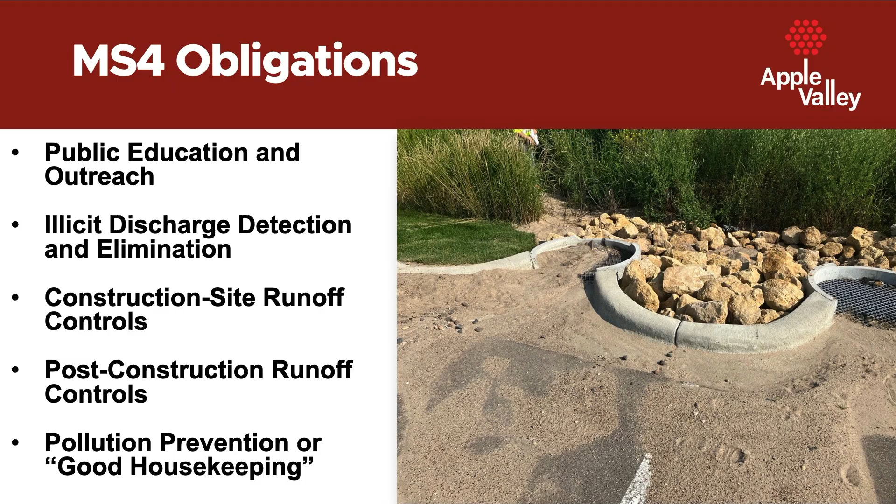So this MS4 obligation, the things that we need to cover: we have to do public education and outreach. We need to discuss illicit discharge detection and elimination, talk about construction site runoff controls, so how you're managing soil on your construction site during construction, talk about post-construction runoff controls, so that's something like installing stormwater ponds after development occurs, and then probably the biggest piece that we have to deal with is pollution prevention or good housekeeping.

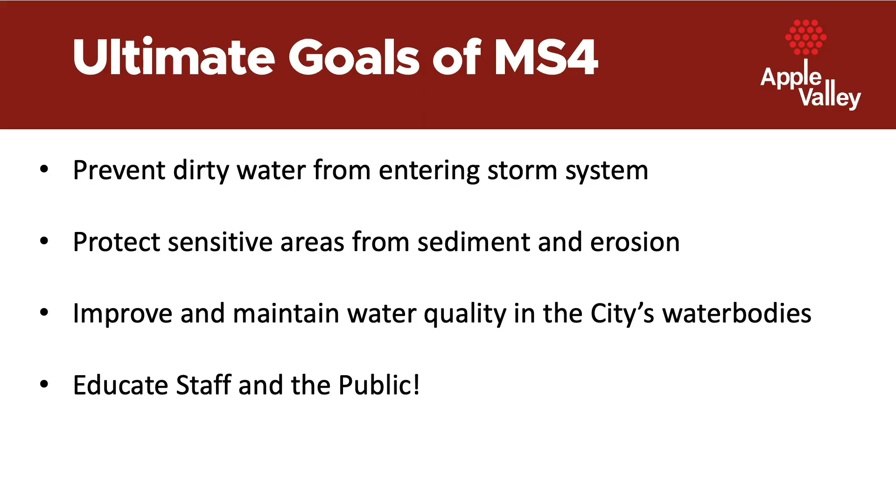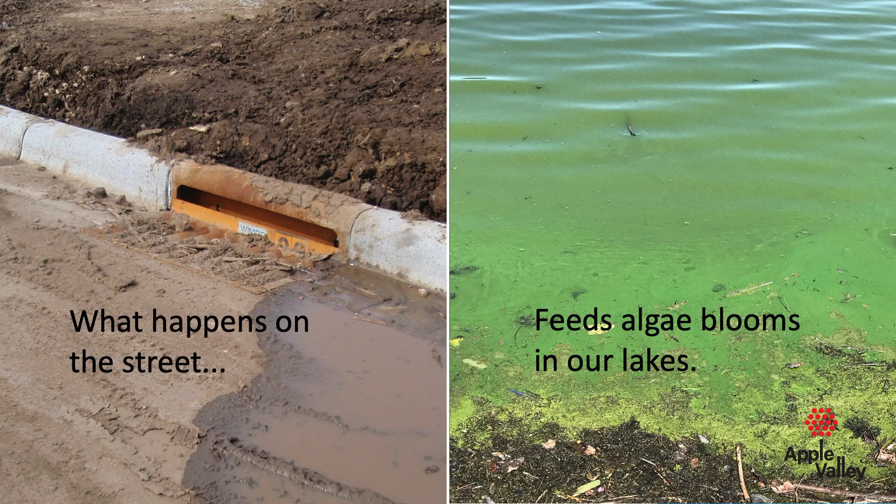If I had to sum up the ultimate goals of the MS4: one, prevent dirty water from entering the storm system; two, protect our sensitive areas from sediment and erosion; to both improve and maintain the water quality in our city water bodies; and then of course to educate the staff and the public. But really to sum it all up: only rain down the drain. Because ultimately, what happens on our streets can feed algae blooms in our lakes.

Just want to cover a little bit of the public education and outreach that we do. We do offer homeowner grant programs and workshops to help improve water quality. We'll offer 50% up to $500 to residents who want to install rain gardens, shoreline stabilization projects, even native plantings. We also educate the public through our topical newsletter articles, which you can see on our website. We allow people to do storm drain stenciling, and then we offer public input at our annual Home and Garden Show.

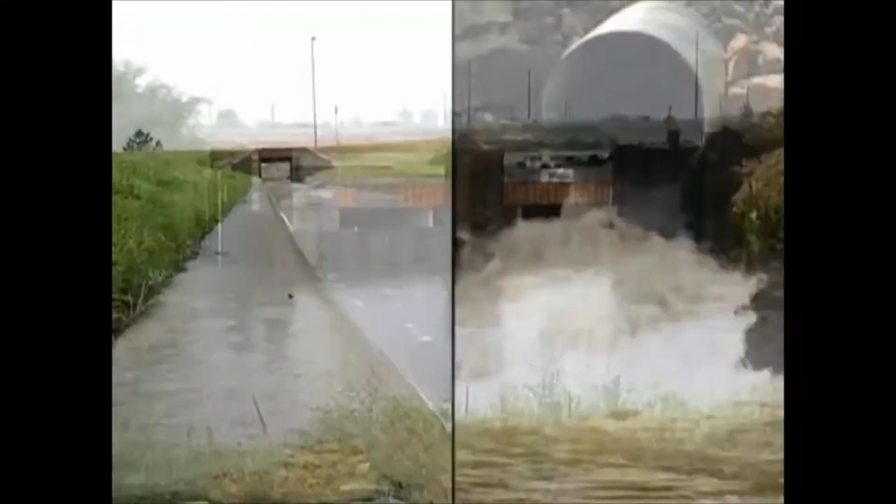It is sad but true that for years, some people have been using storm drains to dispose of their wastes. A lot of people still don't know that storm sewer systems aren't like sanitary sewers. Sanitary sewers take waste from bathrooms and kitchens and clean them up. Storm sewers, on the other hand, do not treat or clean up anything passing through them. Storm sewers are just pipes and ditches designed to channel clean stormwater runoff away from urbanized areas. One of the responsibilities of municipalities that operate storm sewer systems is to prevent what the EPA calls illicit discharges. Illicit discharges are any discharges of non-stormwater into or through the storm sewer.

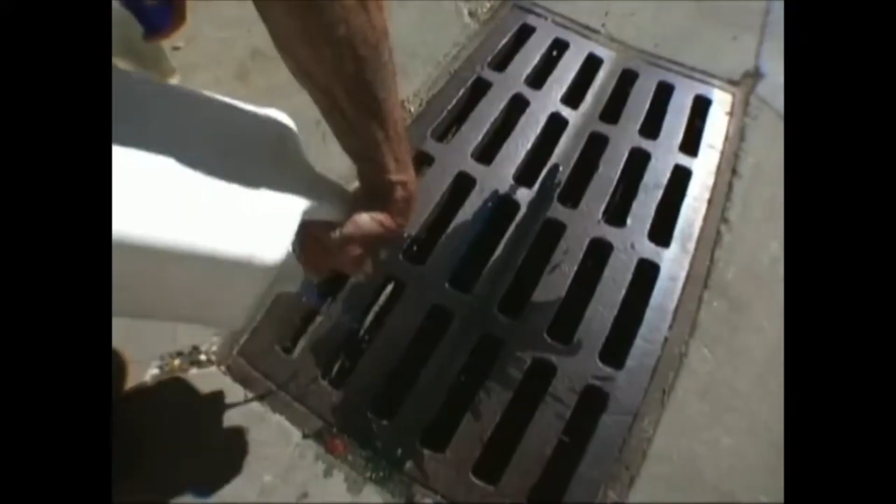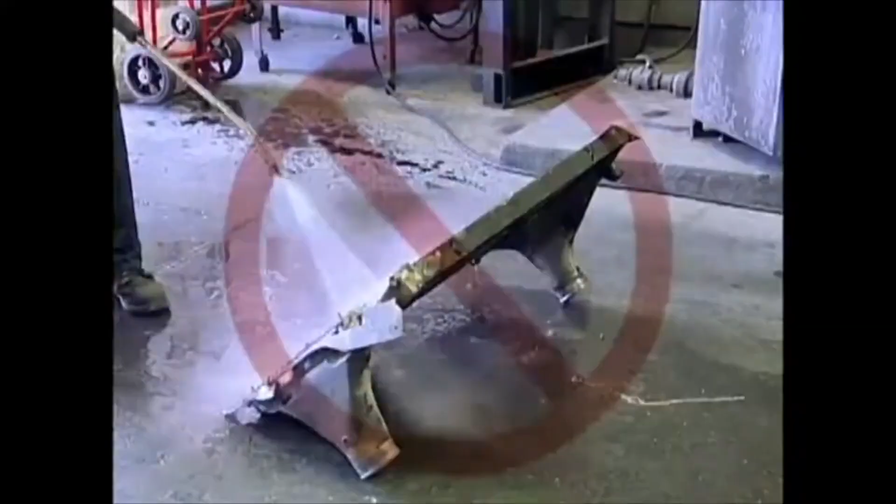Many of us see one of the most common sources of illicit discharges every day: trash that didn't quite make it into an outdoor dumpster or trash can. These wastes are easily washed into the nearest storm drain inlet by the next storm. You may have seen or heard about other bad practices, like dumping used motor oil, engine coolant, or cigarette butts onto the street or down the storm drain. Like cleaning floor mats, filters, paintbrushes, screens, mops, or other items outdoors. Like using a storm drain to dispose of unwanted fertilizers, pesticides, pet wastes, or car ashtrays. It's just like dumping these wastes right into the nearest stream or river.

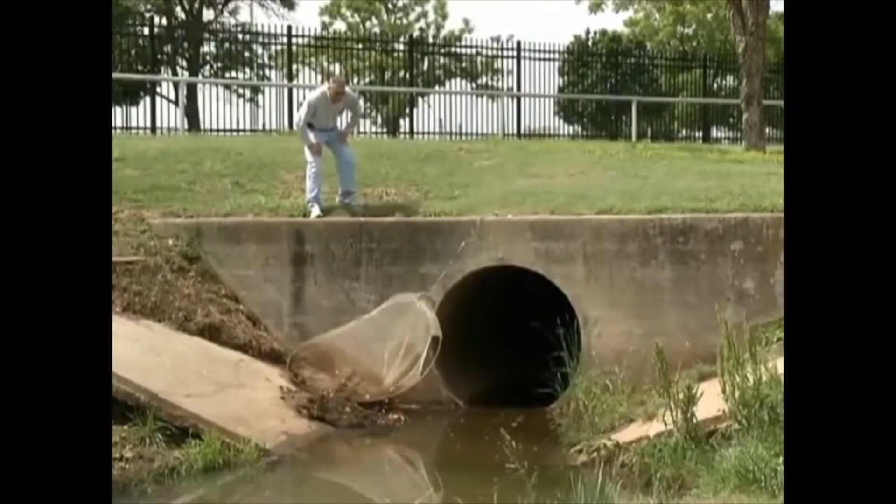Report any obvious or suspicious discharges to your local stormwater authority. The information you provide can directly and quickly eliminate a major source of surface water pollution. Call your local public works or engineering department, or just call the main number for your city, town, or county, and ask who's responsible for stormwater. Are you ready to help?

Now that you have that brief video, if you're out in the field and you witness any pollution occurring into the storm drain, step 1 would be to contain. Step 2, consult your flow charts. Also talk to your supervisor or your foreman.

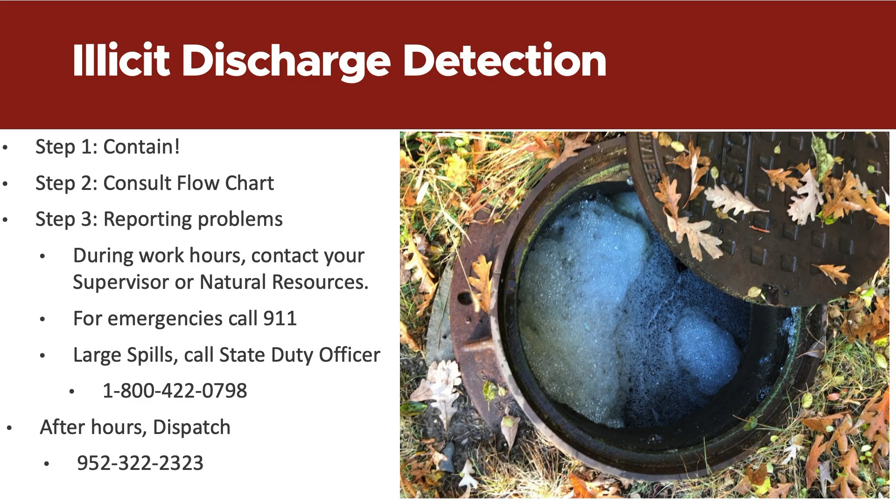In terms of reporting problems, you want to make a call to either your supervisor, natural resources staff, who are also happy to help. For major emergencies, call 911. For large spills, you need to call the state duty officer, and the number's there. After hours, you're welcome to call dispatch, which the phone number is listed as well. All right, with that, I'll send it over to Brian Hartman.

I'm Brian Hartman, the Water Resources Specialist, and I'll be going over erosion and sediment control.

To start, a little bit of history and background on how protecting our water bodies and erosion control became a thing. In 1969, the Cuyahoga River in Ohio actually started on fire. At that point, when a river starts on fire, people say we should probably do something about this, and put some measures into place to control and monitor what we're putting into our water bodies.

So in 1972, Congress passed the Clean Water Act. That was adopted by the EPA and then passed down to state agencies, for us the MPCA, and then it trickles down to our city of Apple Valley MS4 permit. So that's why we're here today.

The river starting on fire was mainly caused by heavier pollutants from industrial facilities along the river. But after that happened, they looked into what else is polluting our water bodies, and found it to be sediment. Sediment pollution is actually the number 1 pollutant in our water bodies today, and is why erosion control is a big deal today.

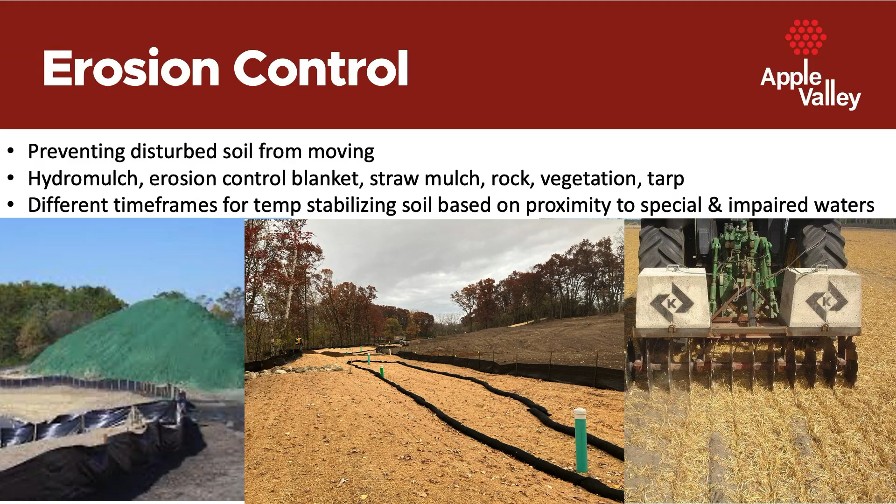This goes for disturbed soil on the ground, as well as stockpiles. Keep in mind there are different time frames for temporarily stabilizing that soil or stockpile based on the proximity to special or impaired waters.

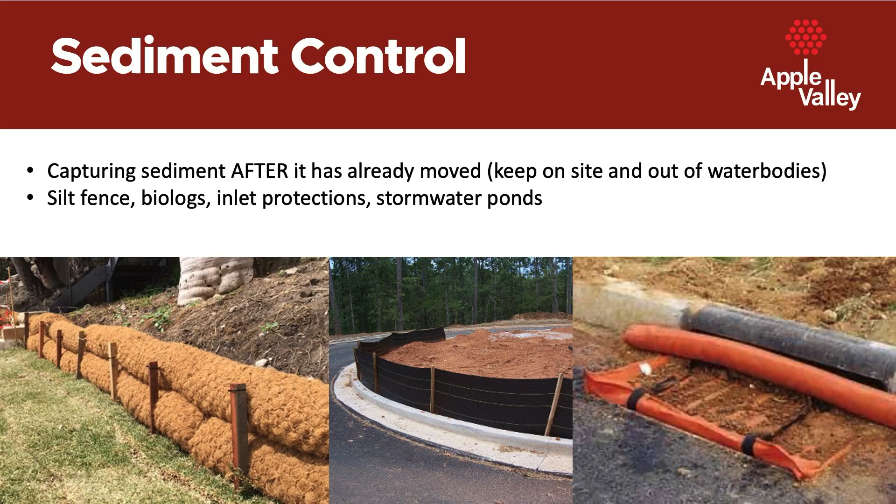A little bit more on BMPs for sediment control. The most common ones we see on site are biologs, silt fence, and inlet protections. We're ensuring these are #1 installed on site, and #2 maintained and cleaned out after they've been filled in with sediment.

Rock entrances and street sweeping. The point of rock entrances is, if it's just one lot, say a singular house, keeping your tires off the sediment to begin with. If it's a larger site and you're going in and out, the rock entrances knock sediment off the tires before you get onto a paved street, ending up in the catch basin.

It is a construction site, so we're never 100% clean, and that's where street sweeping comes into play. If we have track out on the street, we come through with a street sweeper and get it cleaned up before it enters the catch basins, and eventually our local water bodies.

For lakes, rivers, and wetlands, if we're working adjacent to them, the state permit requires 2 rows of perimeter silt fence, just as extra precaution if you're working right next to them. For outfalls, the main thing we're looking for is riprap installed at the end of them, which serves 2 purposes.

One, it slows down the velocity of water, so it's preventing erosion stemming from the apron of the outfall. And two, it does settle out some sediments as well, so we can go back into the riprap, either add more or clean it out. So those are kind of the two purposes of riprap at outfalls.

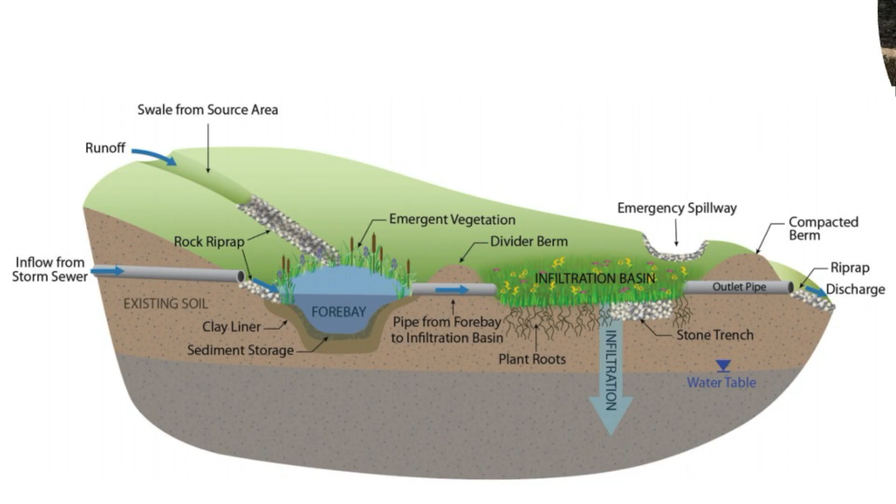One, the more we discharge sediment into our ponds, the higher the likelihood that we're going to have turbid water hitting that emergency overflow and going down gradient. And two is our infrastructure. If we do have a lot of sediment entering our storm sewer system, we're going to have a lot more clogged pipes, which is extra time and expense. And the sooner that pond is going to fill up with sediment and need to be dredged and cleaned out, which is a big expense.

For infiltration basins, same type of deal, but obviously infiltration basins are meant to infiltrate. So they are made up with a specific media to allow that water to infiltrate down back into the water table. In most cases that media is sand. So if we do get heavy loads of sediment coming into that basin, it kind of creates a crust over the top and doesn't allow it to hit that sand and infiltrate. So we have to go back in and clean it out to allow that to happen.

Housekeeping items: having secondary containment on items like concrete washout, portable toilet, paint, gas. If something does leak or tip over and has a spill, we have some measure in place to collect whatever pollutant it might be before it ends up in the catch basin.

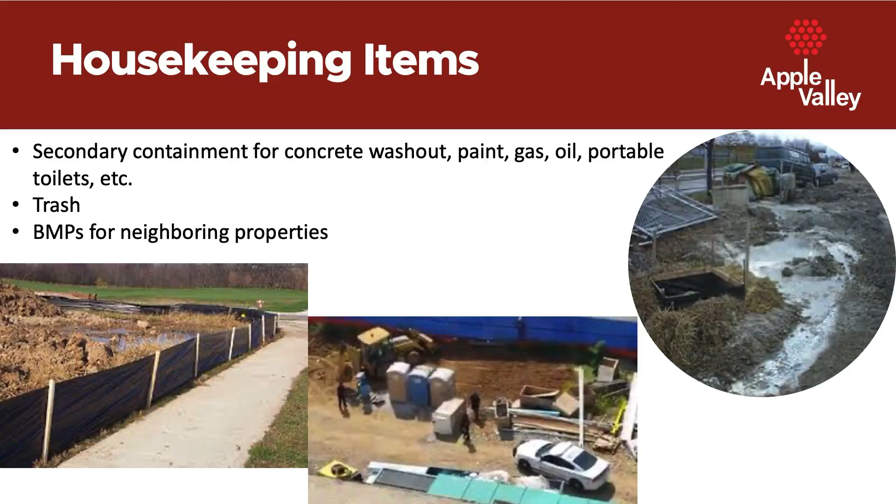So erosion control is kind of a tiered system, I guess. Number one, obviously for the environment, keeping our water bodies clean. Second would be the infrastructure of our stormwater ponds and storm sewer lines. And thirdly is for our downstream neighbors. So we all work in the city, and we get a lot of complaints.

For example, if a house is just put up and they got fresh sod, and there's a construction site going on right next to it with no BMP or erosion control on site, we're discharging sediment onto their new sod. That's where complaints come in, and that's actually the number one trigger for the MPCA to come out and inspect that construction site. So, kind of a tiered system for erosion control.

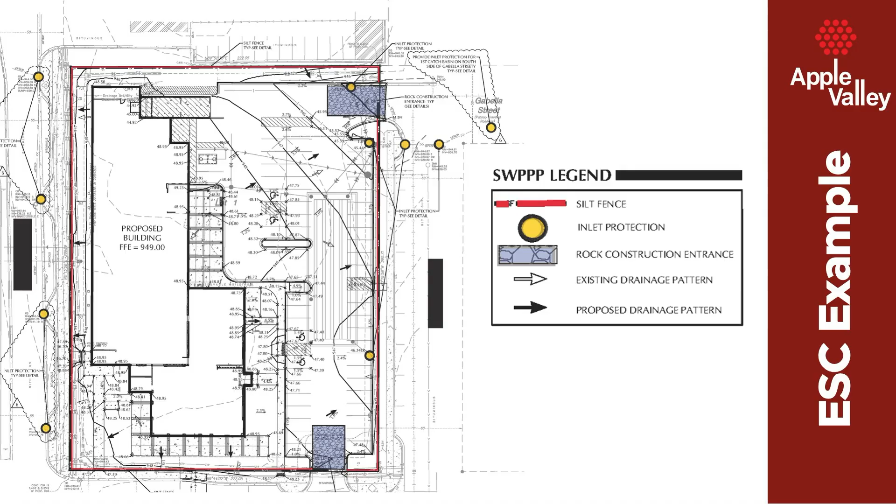Next is a brief example of an erosion and sediment control plan. This is a pretty standard plan, so we have a proposed building in the middle. The red line around the outside is our perimeter silt fence. The blue rectangles are our construction entrances, and the yellow dots are our inlet protection. So if we get a new project in and we're reviewing the plans, we're making sure all these measures are installed, and then when we go out for an inspection, we're making sure they're maintained and kept up to date. So pretty standard plan here.

Bigger construction sites, there's going to be some sort of stormwater pond or basin on site that we're also looking at as well. So, kind of wrapping it all up and putting it together.

So why does it matter? Mainly sediment pollution in this case. Sediment entering our water creates excess nutrients, mainly nitrogen and phosphorus, which Sam pointed out in one of her slides, leading to more algae blooms and bigger algae blooms altogether. It has impacts on our aquatic vegetation, specifically invasive plants, creating an environment for invasive plants to thrive. It decreases water clarity, which impacts the amount of sunlight that can enter the lake and hit our vegetation and allow the vegetation to grow.

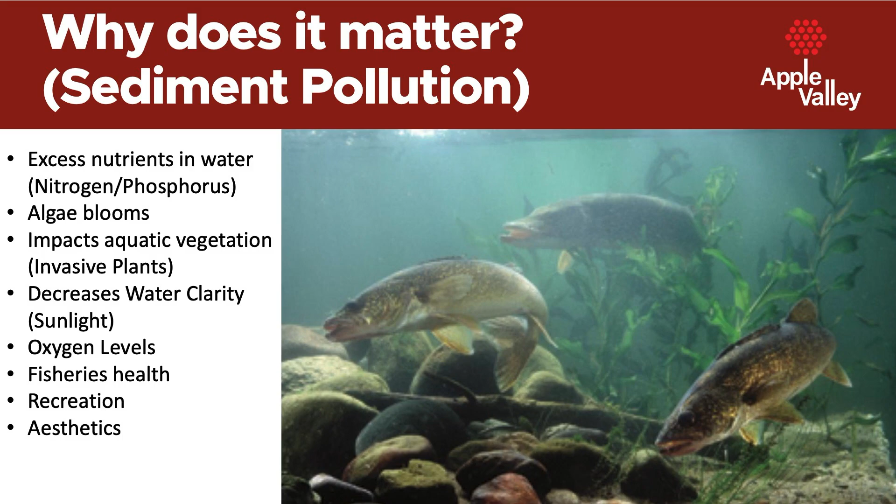It depletes oxygen levels, which impacts our fisheries health, and also just recreation and aesthetics of the lake. Living in Minnesota, we all like to spend a lot of time on the lake, whether that be recreational, hunting, fishing, or just enjoying it. So it's kind of important that we keep them clean.

For Farquar, we stocked 25 adult walleye and 600 fingerlings. The main reason for that is there's a black bullhead population in Farquar. While walleye do eat them, it's not their primary food source, but they do eat them. Black bullhead are bottom feeders, stirring up the bottom sediments and uprooting vegetation, so we want to bring those numbers down. Also, walleye are fun to catch and good eating, so not as much thought went into that one as Alimagnet, but there is a purpose.

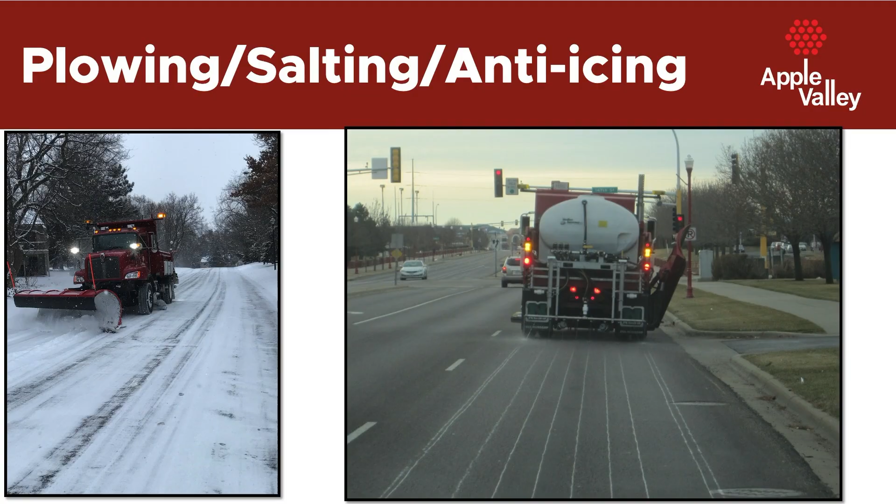Our operators and supervisors attend the MPCA smart salting class. Operators, except for our 2 newest hires, all have their winter maintenance operator certificates. We'll get the 2 new guys going too.

Application of salt and brine is based upon temperatures before, during, and after. If we know it's going to get really cold, we will switch over to our treated salt. If temperatures are in the 20s and rising, we'll try to use white salt. Same goes for our liquids - if it's warmer, we'll use straight brine. If it gets a little colder, we'll put some calcium in there to heat it up a bit. And if it's really cold like today, we would probably have to use straight Apex, which is a calcium chloride additive.

That helps prevent adhesion of the snow to the roadways. That's the biggest thing we strive for. Once it's bonded to the roadway, it's very hard to get up. If you got all that snow packed on there, it takes thousands of pounds sometimes to break it, especially when it's cold.

So sooner we can get that snow off there and treat it before it bonds, the better. All plow trucks, F550s, have a pre-wet system. The pre-wet system wets the salt down, kind of like if you had a dry piece of paper and threw it against the wall, it just scatters. But you wet it down a little bit like a spitball, and it'll stick.

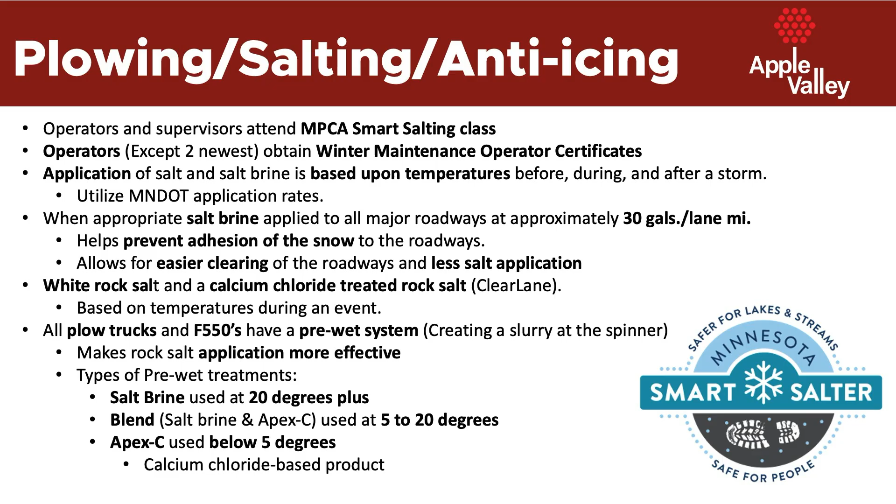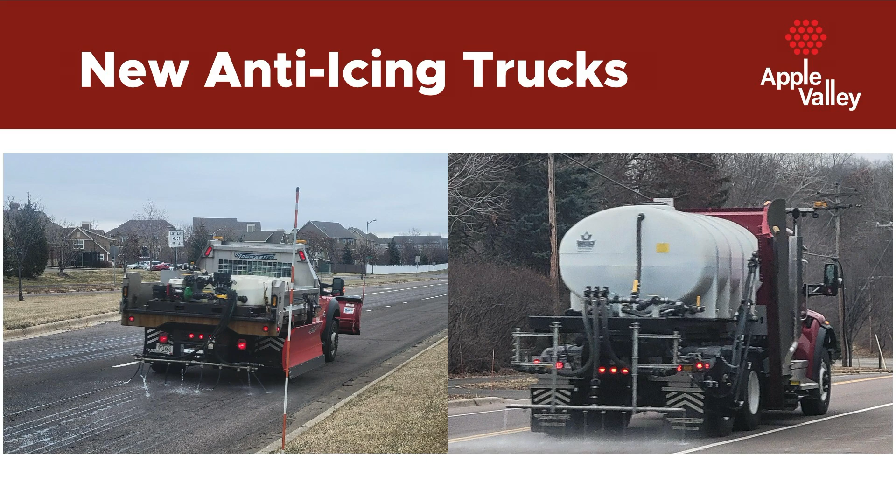Again, salt brine we talked about, used at 20 degrees or rising, as a blend. Then there's the Apex C, our calcium chloride, used when it's really cold like today. We have 2 trucks we can send out to pre-treat roads before an event. See the F550 on the left, and our newest unit, an 1800 gallon tank, to treat roadways before the event.

Storm sewer maintenance - our big thing with streets is we try to keep the roadways clear of debris and sediment. That's why one of our biggest things you'll see us doing is sweeping the streets, getting all those leaves out of there.

Right now we'll be working with natural resources to identify ponds that have excess sediment that we need to remove. Then we will excavate those and haul that material out.

You probably saw us trimming around some ponds in the area. We'll continue to do that and work with natural resources to identify ponds that need trimming. We use our new Fecon head to mulch all that up around the ponds, clears them out, looks really nice.

After large rain events, we'll send staff around to our local area ponds and check to make sure everything is flowing, inlets and outlets are good, and any trees that have fallen over aren't obstructing anything, keeping everything moving.

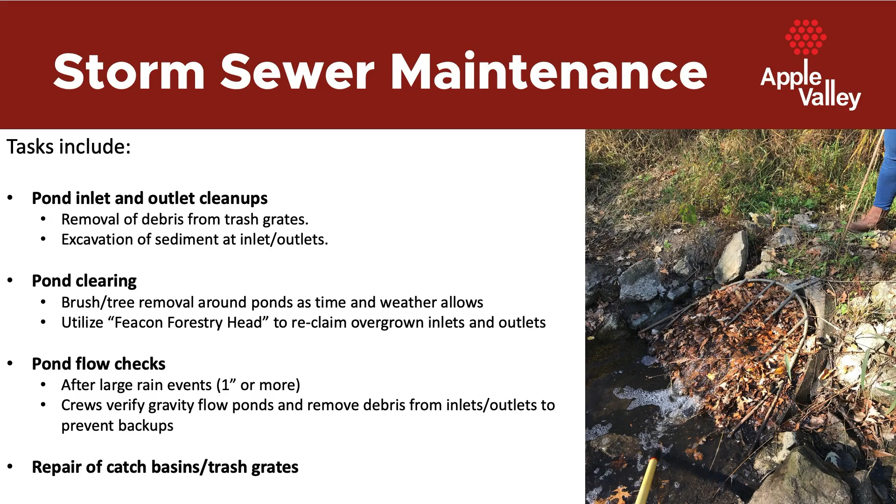When we identify catch basins in the roadway where we see voids or something like that, it lets us know the catch basin needs to be repaired - it's not working as it should. So we'll have our staff actually repair those, making sure they're in good working order.

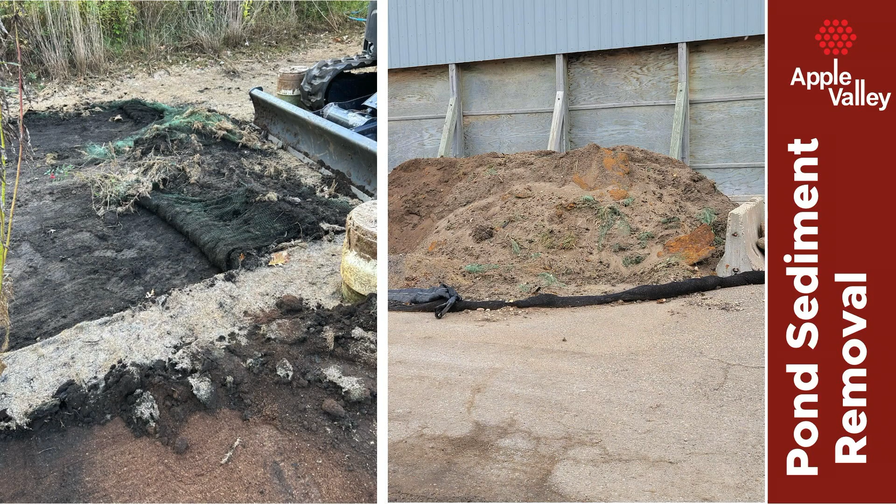Pond sediment removal - we take our excavator, remove the excess sediment, and haul that over by our salt shed. It has to be tested before it is hauled away.

Street sweeping - we just finished up 1.5 passes. We got through the whole city one time and got about halfway through before the snow said that's it for the year for us. So pretty good. Ideally we'd like to get through it twice if we can, because the leaves are usually not even falling when we first start, but we have to start early or we will not get through the entire city.

So for spring sweeping, we try to get as much of that leftover sediment as we can before it enters the roadway. When spring rains come, they wash all that stuff down into our ponds, so we do our best to get as much as we can before it becomes an issue and sediment builds up in the ponds.

In summer, we'll use our Tymco regenerative air sweepers to maintain as construction projects are going on around and people are dragging mud and other materials into the road. We try to get out there as much as we can to keep everything clear. We also have 3 intensive sweeping areas we try to hit monthly as time allows.

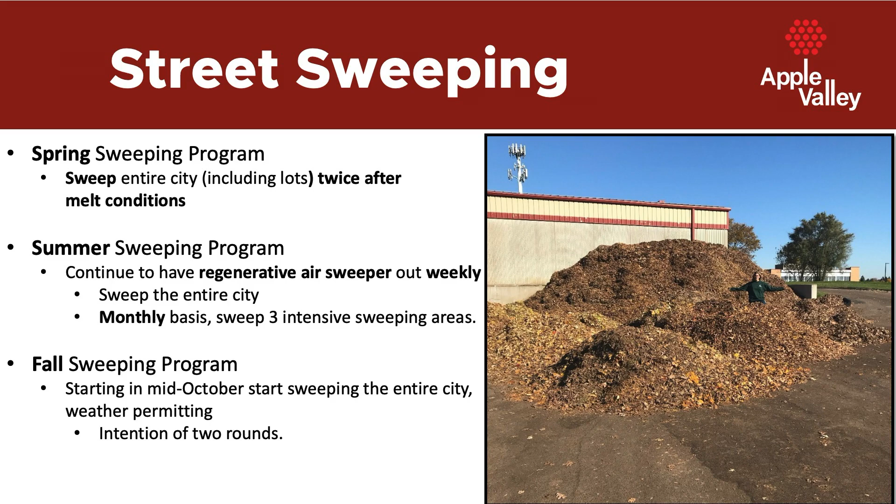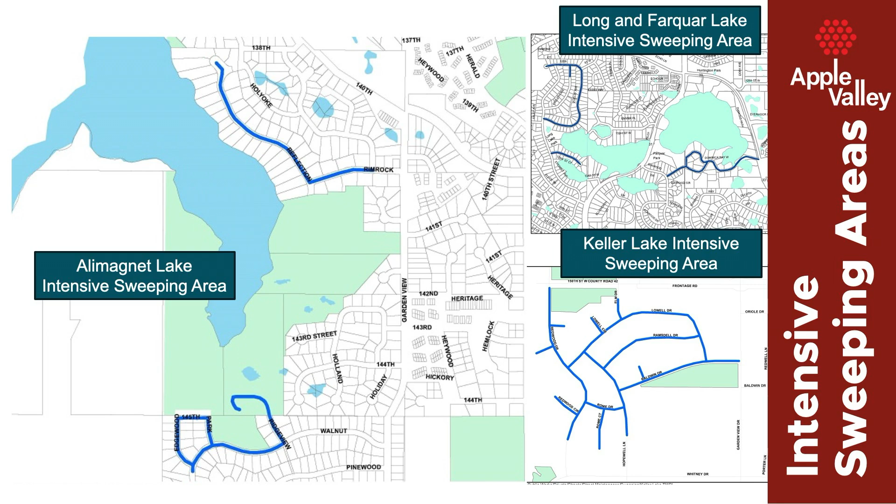So here are those areas on the map. We've got our area out west, Alimagnet. We also have Keller Lake and Long and Farquar. Those are the areas you'll see our staff focusing on.

Material storage and track out. All materials are stored outside, so we make sure that we have the proper erosion barriers to prevent leaching from the piles. Around the salt barn, you'll see we have erosion logs to make sure all the rain and stuff isn't running into our storm drains.

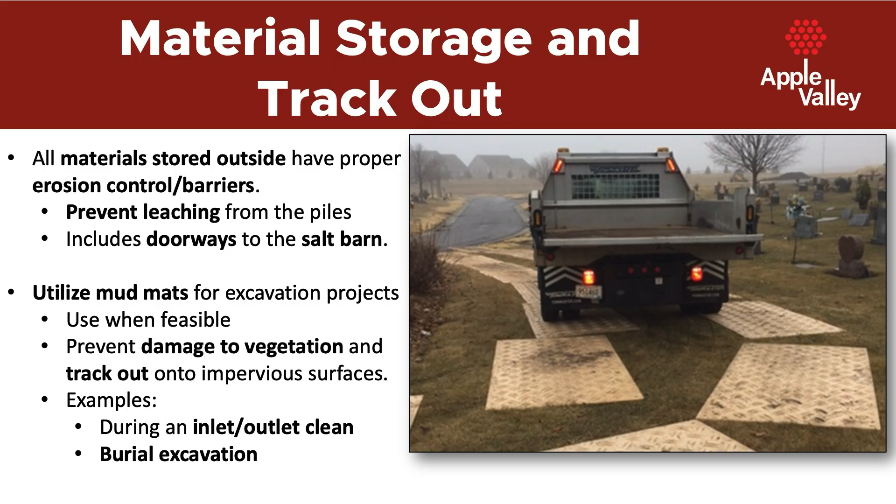Utilizing mud mats when we're doing excavations around ponds, as well as when we're doing cemetery digs, making sure we're not tracking any dirt onto the roads. And if we do, we sweep it up. Anything that's outside, we contain it.

That's kind of the picture on the right side. We cover our salt to make sure rain and snow is not getting on that. And then anything that is kept outside for long periods of time, we will wrap that up, keep it from the elements from ruining those.

So that's what I had. Thank you.

Hello, Scott Werner, Fleet and Building Supervisor, here to talk about some spill response plans that we have in place.

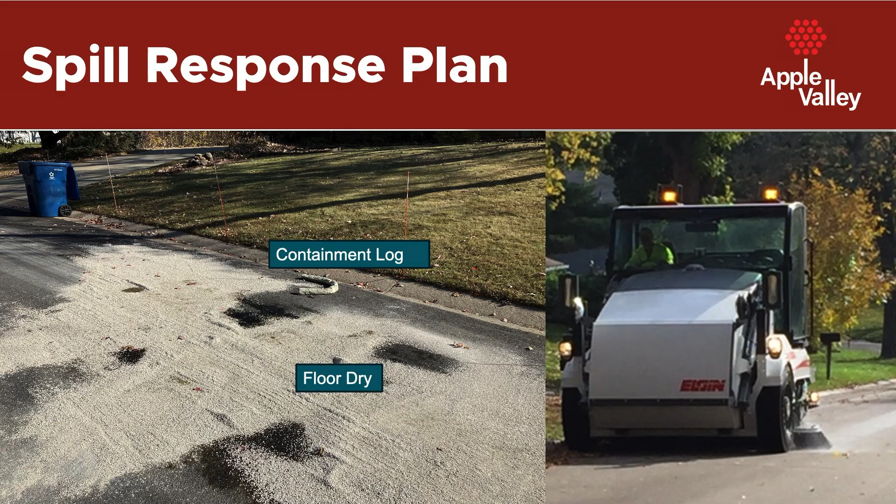Here the picture shows, I believe this was actually a garbage truck, so we had contacted the company about getting out there to get their floor dry out to try to soak up some of that oil material that was spilt on the roadway. It also shows a street sweeper to get that cleaned back up, to try to help eliminate any of that from going down the storm drains.

Along with the spill response, we have spill kits located throughout the shop. Above the fleet foreman office, there's some spill kits up there along with some absorbent towels and absorbent pillows. All the plow trucks have spill kits in them as well, since we have a lot of hydraulics on them. They do leak, blow a hose from time to time, so to help contain that if need be, we keep them at all the plow trucks.

Some of the foreman trucks have them as well, and we also have some at the fuel island in case there's a spill or an overfill while fueling. Floor dry locations, I know we have a couple different locations for them. Throughout the fleet maintenance shop, there's multiple locations where you can get floor dry.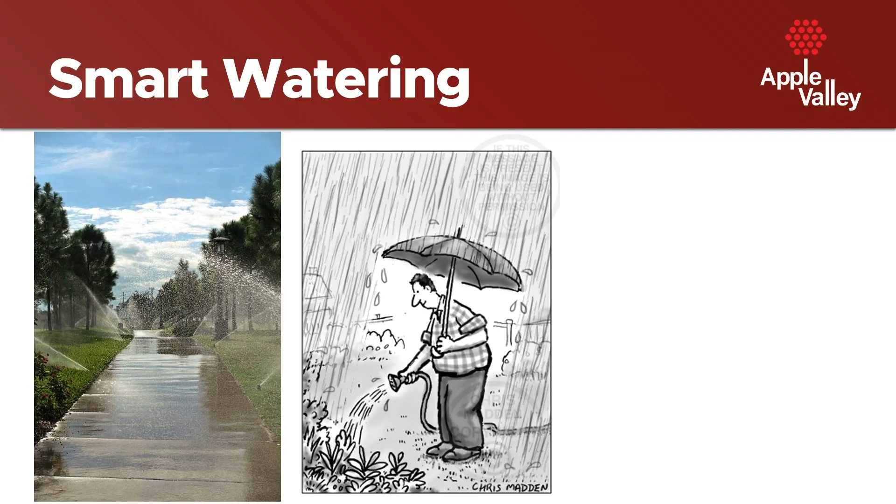Smart watering. Pay attention to where we're watering. We don't want to be watering hard surfaces, don't need to. Know the existing conditions—if it's raining, don't water. There's a lot of rain sensors on our irrigation systems; if we get half an inch of rain, it shuts them off, so we're not overwatering.

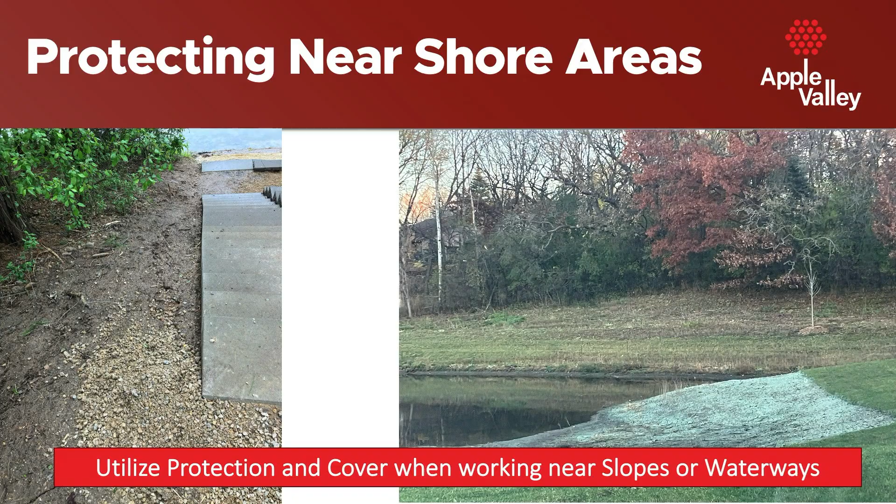Seeding disturbed areas, kind of the erosion control thing. This is after we did some forestry mowing—all of our parks following that basically got bare ground. We're seeding not only to get something besides buckthorn to grow there, but also to stabilize the soil. This one's on a hill, so we're trying to keep everything where it is, cover the soil, and protect near our shoreline areas, using protection and cover when working near slopes and waterways.

That's blankets, and hydro mulching works real well. The picture on the left is a stairwell we have—some of that's rock in there, which will slow down the erosion going down that hill, especially towards the lake. We also have biologs in there to contain anything that does run off.

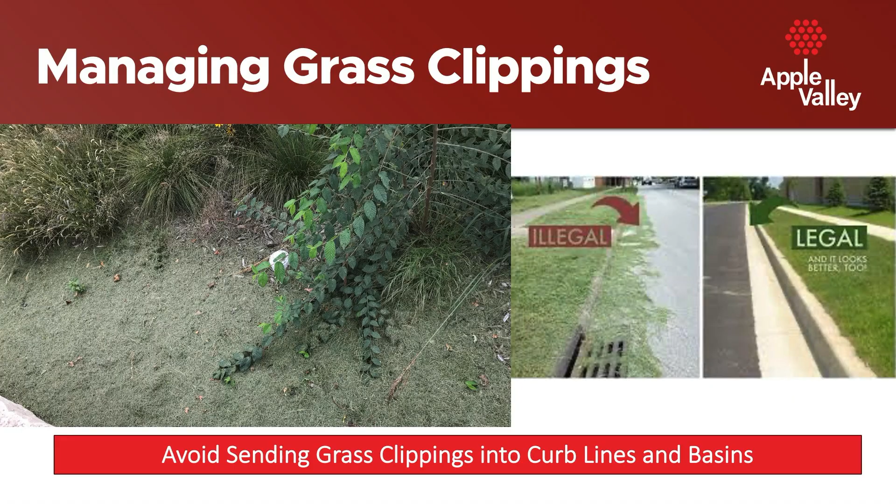Managing grass clippings—we deal with this quite a bit in parks. Again, it's only rain down the drain, so any grass clippings that are on hard surfaces, we try to get out there and blow it off back onto turf areas.

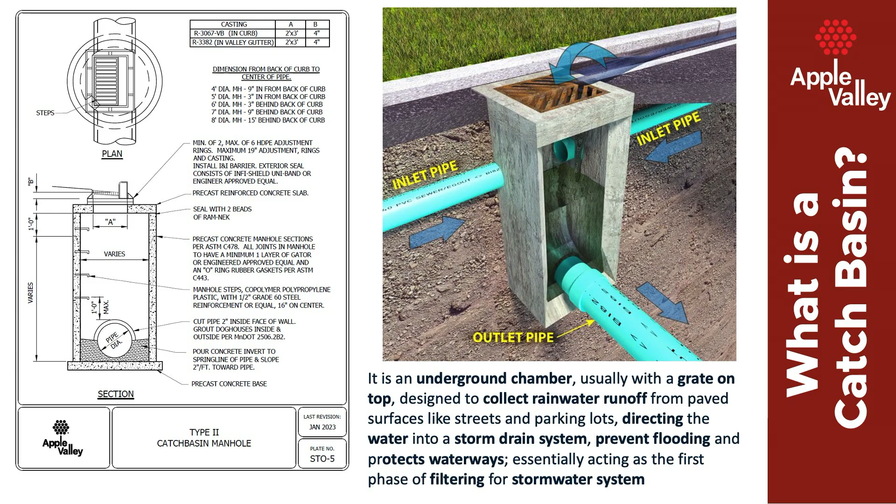As you're driving down the street and you start seeing these catch basins next to the road, this is a description of what they look like and how they work. The sediment or water comes off the street, goes into inlet pipes that drop into the structure, and then gets piped out of the structure into ponds and so on. As you can see, there's nothing to catch the sediment, so as it comes in, it all ends up going towards those ponds.

That's why we're doing some pre-treatments. With natural resources, we're putting in a lot of the water—I can't remember what they call it—the little ponds along the side to catch a lot of this runoff so it does not end up in the ponds. One of the items we use to try to stop that from happening is the sump catch basin.

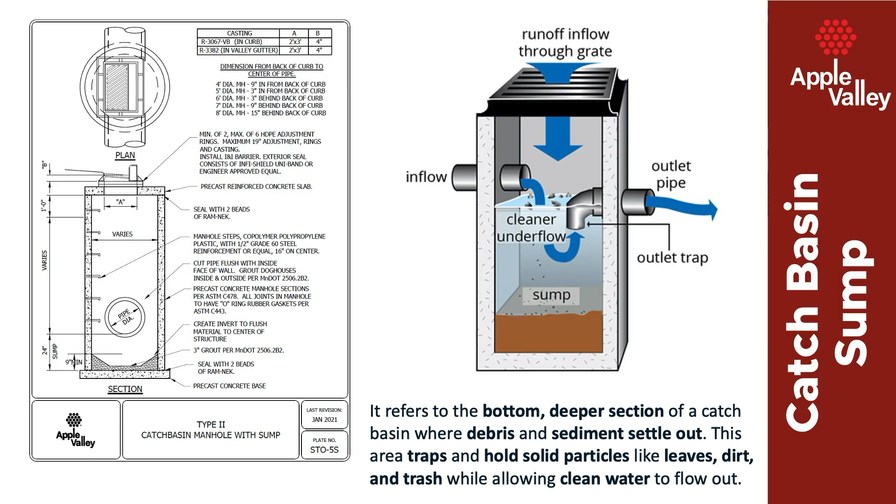During the spring or summer of the year, you'll start seeing a combination machine, Vactor, going to all these different sites, vacuuming out the bottom of these sumps. As you can see in the picture, you've got two inflow pipes coming into it, or inflow and outflow, and as it comes in, it slows down that water, which is ultimately what allows the sediment to drop out into the bottom of the sump. As time goes on, that sump fills up and needs to be cleaned out.

So we do currently have contractors that come in, and have been doing it the last few years, cleaning out those sumps and allowing us to keep that sediment from getting into our pond systems. So that's one of the best ways that we have of doing that.

Usually when we clean this, we've been getting between 1.5 to 2 full vactor loads out of there. So it's a very successful system. This is normally sediment that, if we didn't have it there, would end up in Cobblestone Lake. So this is one of the more successful things.

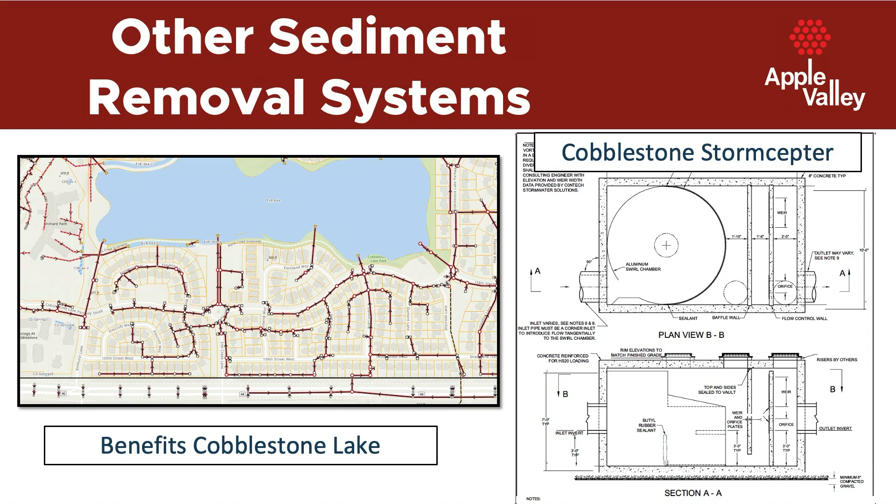It also has multiple chambers. The different chambers catch some of the floatables, like aluminum cans, plastic bottles, that kind of stuff, which separate into a separate chamber. Those items are also vacked out by our crew. One thing we did to make it a little bit safer is add a second opening in the top, so that when we're vacuuming, our crew still has a way to get out of that structure. So this is one of the better working ones we have in town.

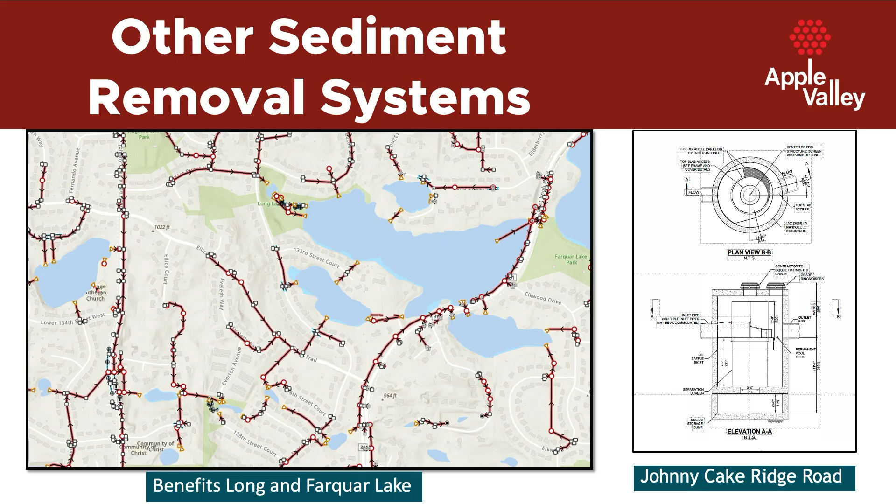As I mentioned, as we did the Johnny Cake Ridge Road reconstruction project a while back, we added more of these separators along the way, I believe 3 or 4 of them. Again, these separators come in right before we end up going into a pond, to obviously stop that sediment from entering those ponds.

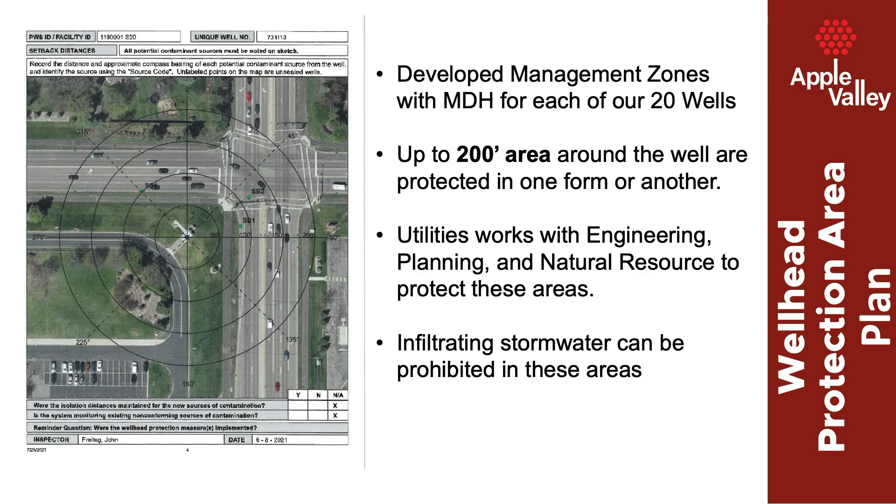This is the wellhead protection area. They do have setbacks. This particular one is well 16, right next to Pilot Knob and 140th Street. One of the important things around our wellheads is to make sure we have setbacks from stock, like a feeding cow pasture type thing, and from infiltration type ponds nearby. There are certain setbacks from the wellhead. The wellhead itself also has to be elevated above the surrounding areas so we don't have drainage coming in right next to it. These are all things we keep in mind as we're installing new wells.

Well 5 is probably the one that has the closest stormwater basin next to it, but it is not an infiltration basin, it's just a storage basin that ends up going out and then down the hill.

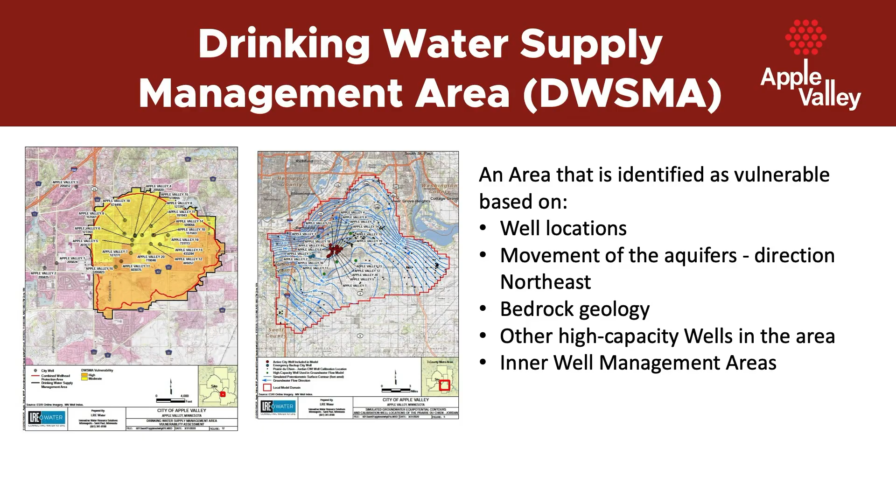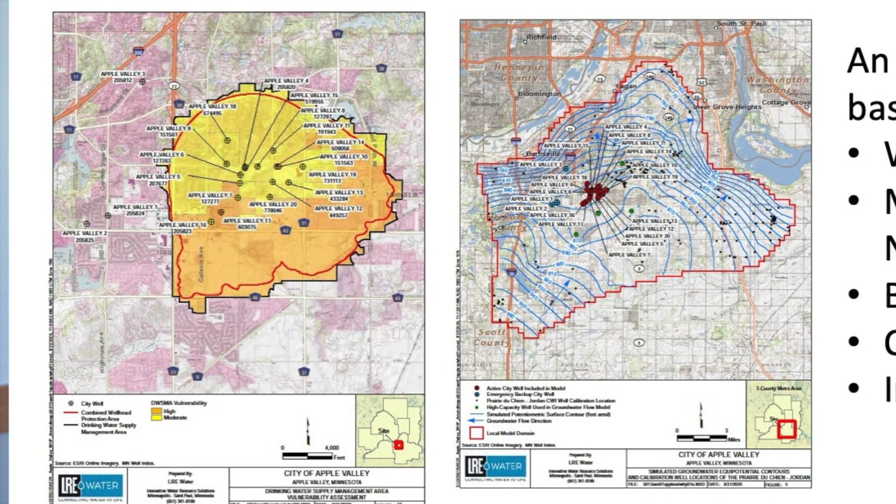You can see on this yellow map a bunch of our wellheads and where they're at, and the areas that have high amounts of vulnerability and lower amounts. The more tan color is high vulnerability, and the bright yellow is moderate, close to those wellheads. We want to make sure nobody is influencing them by dumping materials near the wellheads and so forth.

As new plans come through, we look at those plans to make sure we're not having any influences next to our well sites when they start putting new construction in, and so on and so forth.

Good morning, everyone. I'm Evan Acosta, the assistant city engineer. Everyone did a great job before me introducing the MS4 permit and the things we're trying to protect in the city—water bodies, storm sewer, streets, natural amenities.

I'll be giving an update on our Apple Valley Additions stormwater improvement project, which pairs nicely with today's discussion on maintaining our infrastructure.

The Apple Valley Additions, if you're not familiar with the term, is the neighborhood south of County Road 42, east of Garden View Drive, west of Pennock, and north of Whitney Drive. It's one of our biggest neighborhoods in town, and also one of our oldest.

It's deficient in storm sewer, and we've identified a long-term street reconstruction plan to address the failing utilities and streets in that neighborhood. I'm sure all of you who have driven down the streets there are well aware of the condition, and the utilities are just as bad, if not worse.

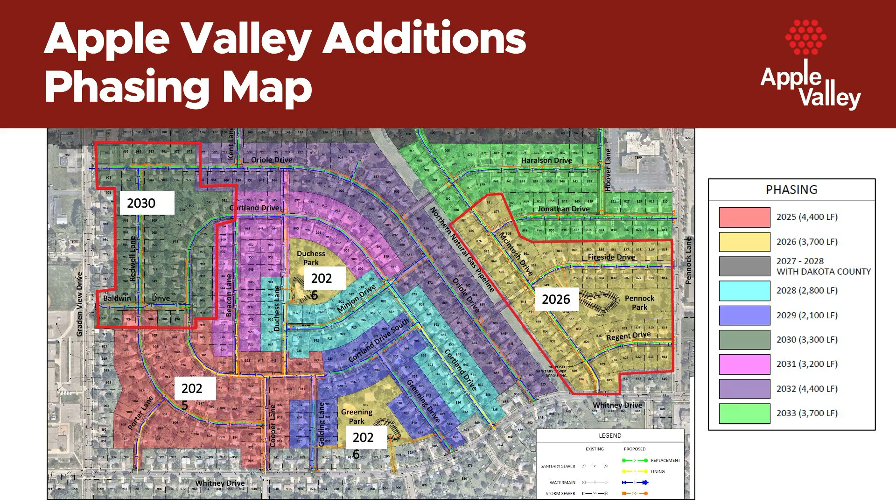What's in gold is slated for 2026, and that's what we'll get into on the grant-funded work. You can see, in addition to some streets, we also have Duchess, Greening, and Pennock Parks highlighted.

I won't go through the whole thing in detail, but I want to highlight that we'll be utilizing a combination of infiltration basins, traditional wet ponds, and other infrastructure in the street as part of a $5 million grant awarded from the MPCA to complete the work.

The MS4 permit prescribes what the city must do to protect our ponds. There's an additional section that talks about what we have to do to treat stormwater when we reconstruct streets. This really started back in 2017 with our Keller Lake subwatershed assessment, where we knew we'd be coming through here sooner or later to reconstruct the streets.

At that time, we knew we'd have some amount of ponding required, but didn't know what that looked like yet. So we set out to identify a good candidate. We identified Duchess, Greening, and Pennock Parks, given that they sit in the middle of this monster neighborhood, as locations where we need to do something.

That was built upon from 2021 to 2024, when engineering looked closer at what the streets and utilities need in the neighborhood—whether a full reconstruction or a partial reconstruction is required.

As we built upon that, we took a closer look at the size of the ponding that would be required and the costs associated with it, and we realized we were going to spend nearly $3.5 million in stormwater funds on treatment for stormwater that was required—just for doing the work in the streets.

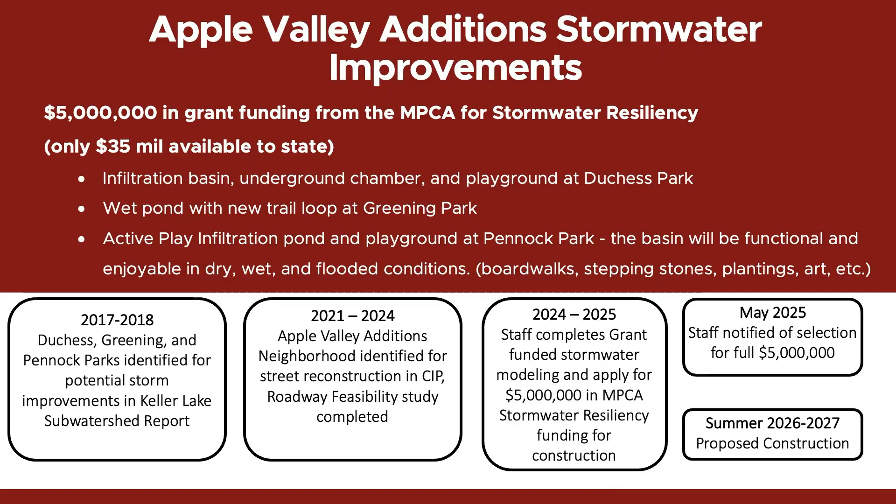That project itself, I mentioned we're going to spend $3.5 million to do the minimum. We came up with an estimate it was going to cost $6 million to do the maximum. So obviously we're not going to spend more than the minimum if there's no grant match, but we applied for a grant, and we were fortunate enough to receive $5 million in funding. That takes our stormwater amount from $3.5 million down to $1 million, and I'll show you what that looks like now.

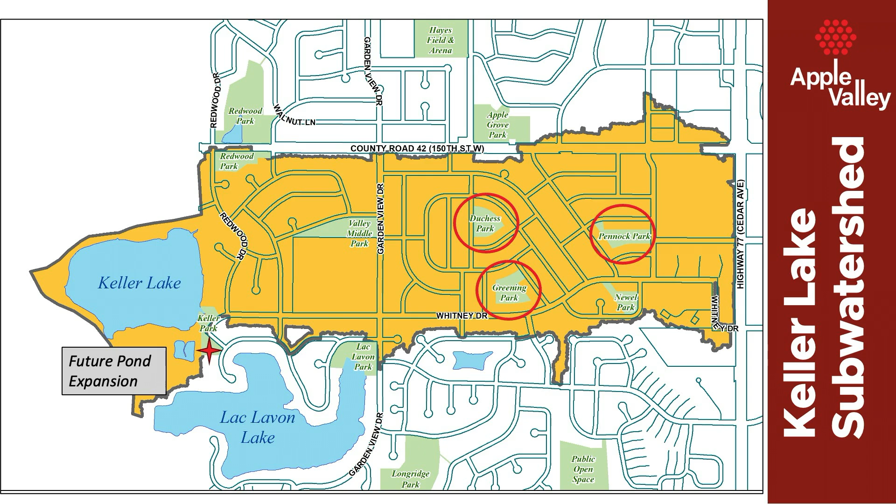So Duchess, Greening, and Pennock Parks, as they sit in the watershed—this is a pretty big watershed. Keller Lake is still impaired, hopefully until the projects are delivered. One of the goals of the project is to pull Keller off the impaired waters list.

That feasibility study, where we looked at doing the maximum, produced some of the graphics you're seeing here. Duchess Park would receive an infiltration basin in the southwest corner of the park, the smaller triangle there. In order to maintain the play space within the park, or the ball field space, there's an underground infiltration tank proposed in the outfield. That will handle an enormous amount of stormwater and provide the treatment and detention volumes that the grant provides for.

Greening Park is likely to be a traditional wet pond, just given the soil conditions there, but that will sit outside of the ball field far enough away that kids scheduled to play there shouldn't routinely hit home runs into the pond. That was originally proposed to feature an asphalt or bituminous trail around it. We may be pulling away from that depending on what we learn about where our funds sit on our cost estimates, but originally that was for a bituminous trail around the park.

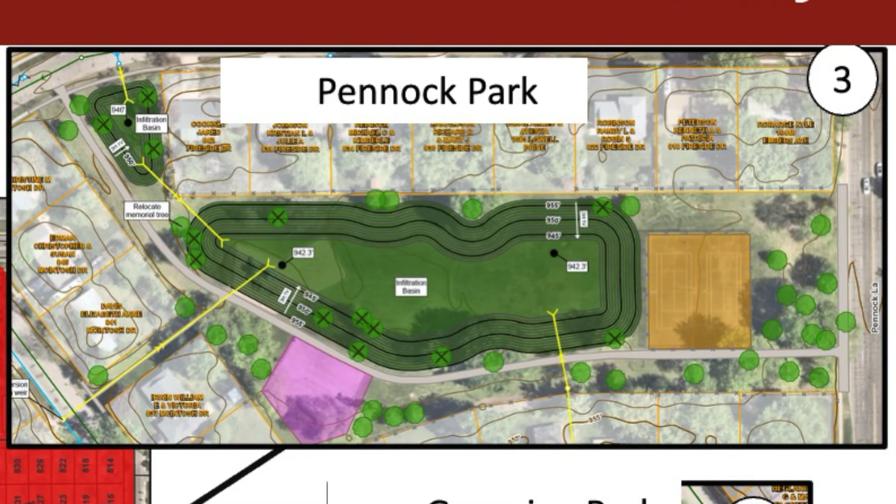Pennock Park is our biggest investment of resources as part of the grant. It features an extremely large infiltration basin, and you can see there's a small one up at the top of that. Those infiltration basins will serve as the largest water treatment and flood risk reduction component of the project. I'll get into the flood risk piece of that after this.

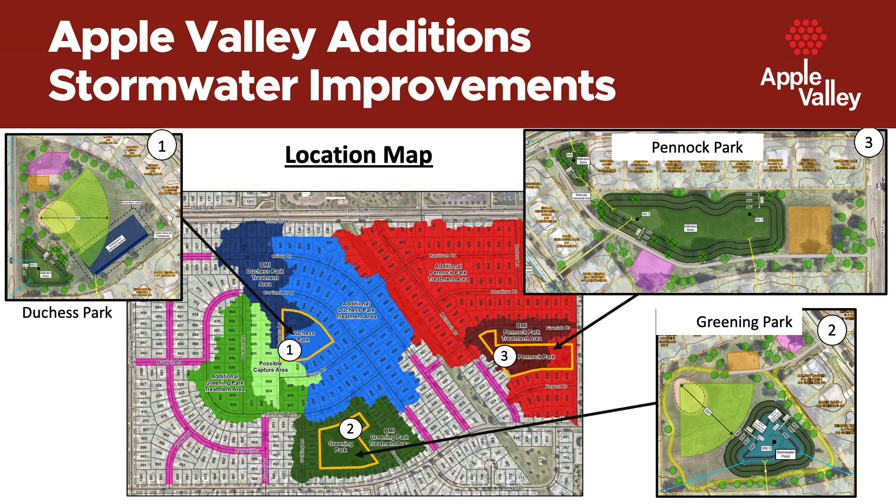In all three parks, as part of the grant, we were able to use some of the park amenities that were planned for upgrading, like playground equipment and other features. We were able to apply and use that $5 million in funding to cover what's being impacted as part of the stormwater park—sort of an olive branch, if you will, to get Eric to allow us to even look at doing this. We're happy to report that a significant amount of the improvements to playground equipment at Duchess and at Pennock Park will be funded by the grant.

As I mentioned, the MS4 provides a section that says you shall provide water treatment for this amount based on your street reconstruction. It doesn't deal with the park amenities, and it doesn't deal with the flood risk reduction component that sometimes we can look at with these other projects.

A piece of our feasibility study showed a modeled flood shape—it's just modeled, we don't have moving water to have an actual floodplain—but it shows there's a significant amount of homes at risk in the neighborhood today. We're well aware of that: the pavement's in such bad condition because there's nowhere for the water to go. It sits, and the freeze-thaw cycles bust up the pavement. There's no storm sewer in the neighborhood now; everything drains to Whitney. By implementing such a large stormwater improvement project, we're able to shrink that flood shape so significantly that we're estimating about 88 homes will no longer have a modeled flood risk.

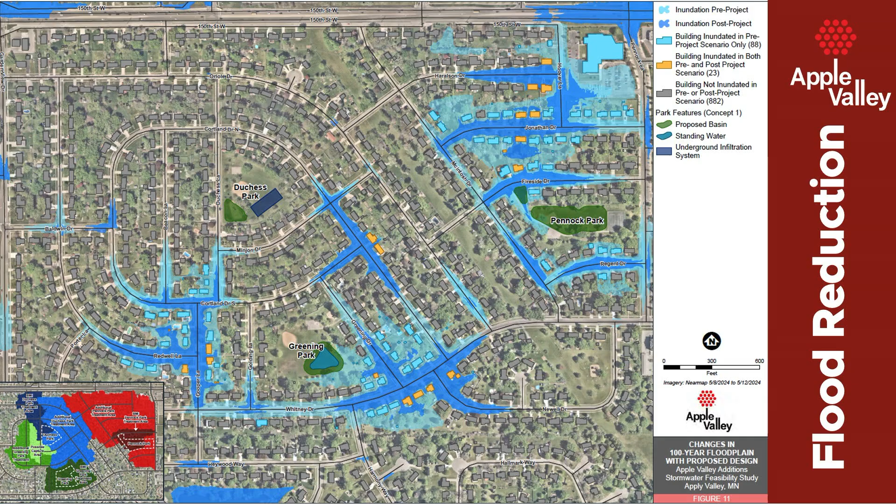Now that's not quite the same as saying they have FEMA flood insurance, but that's still something that's noted. And if you were to go buy a home on Zillow right now, the houses in that shape have a flood risk layer on Zillow that would show they have a high flood risk. So this data is out there. This data matters to people. It does have an impact on their lives. That's just a piece, a really big piece of the project that we wouldn't otherwise have considered if we didn't have the grant funding.

So the timeline on this project is we started a kickoff earlier this summer. We're moving through the design phases right now. We have concepts, and I can get into each of them, but we're planning on bidding the project in March with construction to start in the summer of 26. The grant requires that we're complete with construction by the end of summer of 27, so this is going to be a lot of work to bring in a pretty short amount of time.

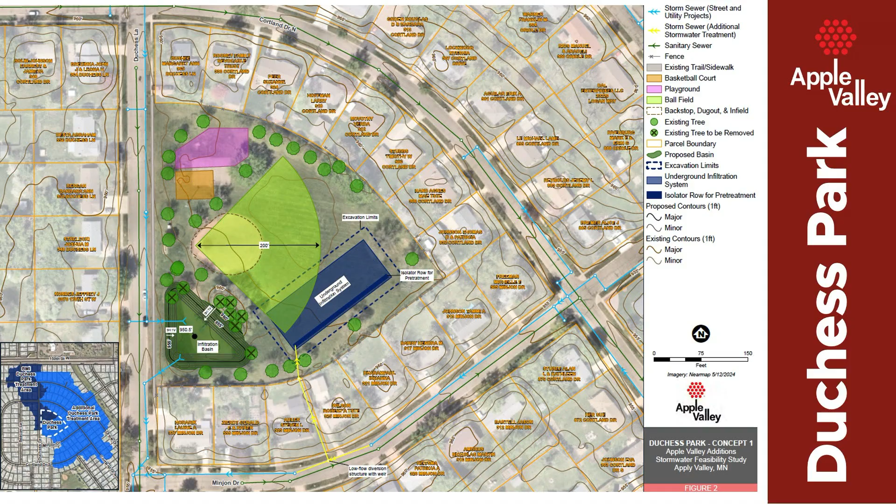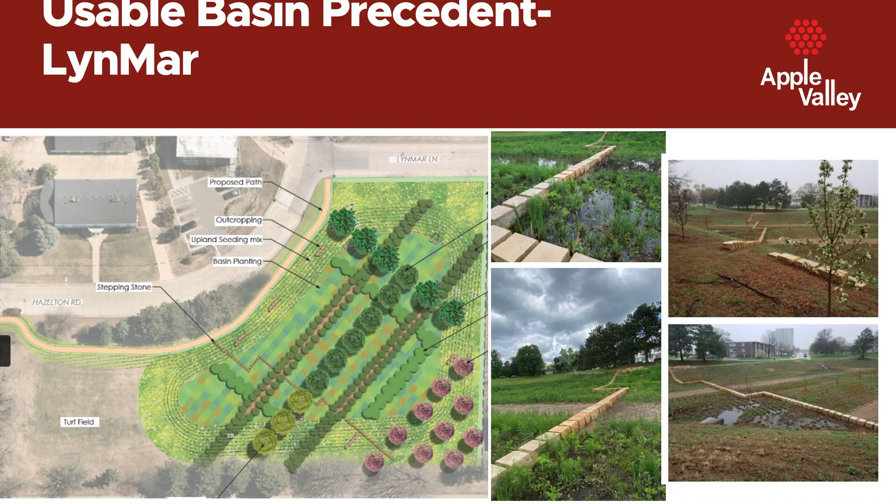And then for Pennock Park, this isn't Pennock, but this is one of the projects we used as inspiration that basically asks: what can we do inside of a basin that isn't just leaving it alone or letting natives grow? So the grant's providing significant funding for us to incorporate landscape or other natural play amenities, similar to this basin, which is in Edina.

So we're excited to bring this forward. It's going to be a pretty enormous ask to get this delivered, and I know for those of you who maintain the infrastructure it probably feels like we said, how can we make maintaining this as difficult as possible? But we're looking closely to make sure things that need to be maintained and regularly accessed are kept close to the street. There will obviously be times we need to be inside these basins or underneath accessing that storm chamber, but for the most part we're doing everything we can to make sure all the pre-treatment, and those substructures Kent mentioned, are out front and in the right of way for us to access.